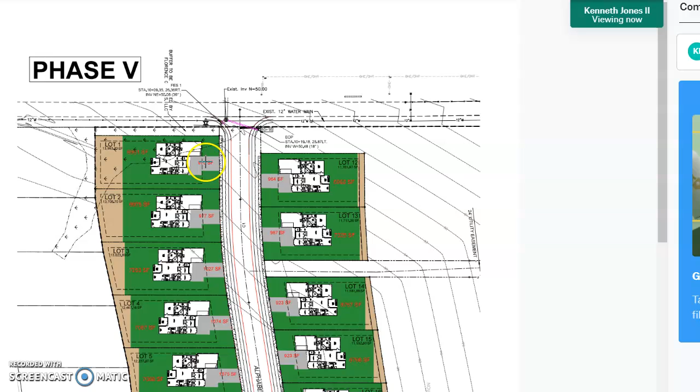There's also, in each one of them, we're able to see the area of clearing and filling and sod. So very important also from a sales standpoint. This is the area that the green area will be the area that we are planning on sodding for the homeowner. And the driveway square footage, as you can see, I'll zoom in a little bit, is approximately 970 square foot. Some of these are a little bit bigger just because the house is pushed back a little bit further in the lot. And then we also have this brown area, which will just be mulched underneath and left as a tree barrier. So we will have an option for the homeowners to be able to clear this and sod this as well. However, this is what the lot comes with.

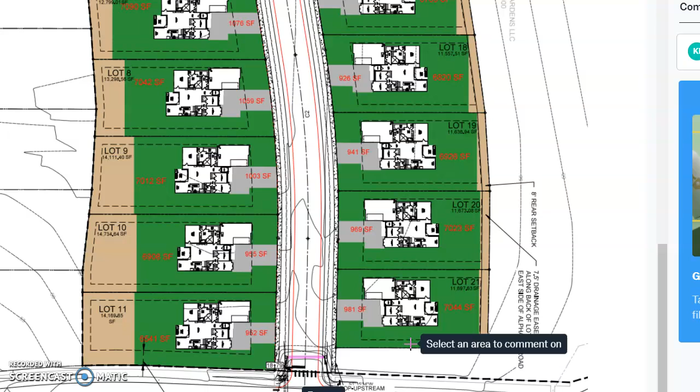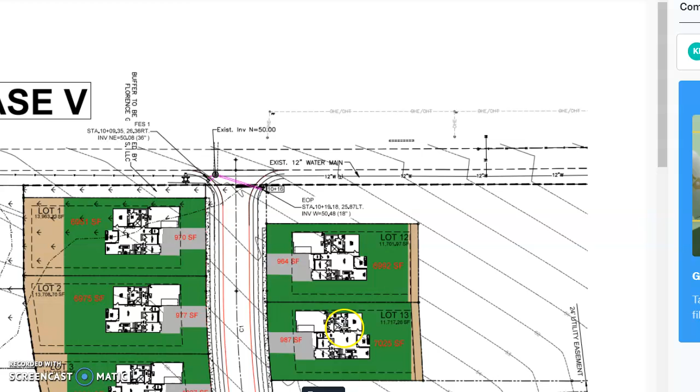So we take all of these and we put them into a spreadsheet, determine cost for each one of those, and then do an average to be able to make sure that we're adequately spacing out the cost so one lot doesn't cost $5,000 more that doesn't get passed on to the homeowner for that exact lot, because it's no different. For example, lot 12 and lot 13 are basically the same lot. No piece of real estate is exactly the same, but for all practical purposes, there's no reason that someone may pay more for lot number 2, for example, as opposed to number 3, even if lot 2 cost us $5,000 more to build on than lot number 3.

So understanding lot issues is the second reason. I'm going to go back over here to phase 5. Some of the things that can always come up in this are easements. So there is an easement that goes back to some other houses back here. That's the main entrance for the community. There's a drainage and utility easement.

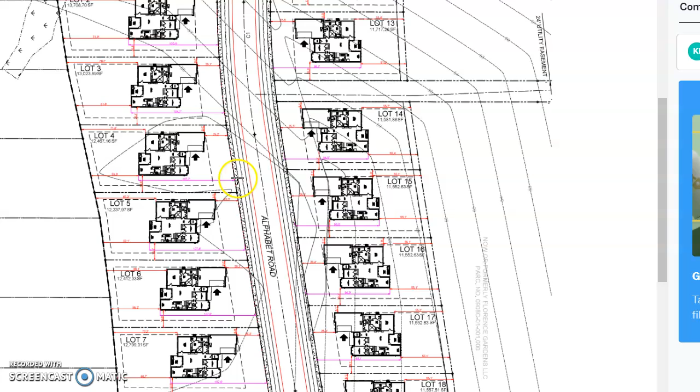We also run into culverts that would be potential on these roads. In this particular community, there are no culverts because there's no underground drainage. A lot of times we've seen where a culvert that was supposed to be on a lot line would be, for example, right here. That would severely inhibit, without major modifications, the ability to put a car and drive over it and then pull into the driveway. So if there was a culvert here, then we may have to face this house and have it be a garage left instead of a garage right. So the driveway would come from here and then over into the garage from there.

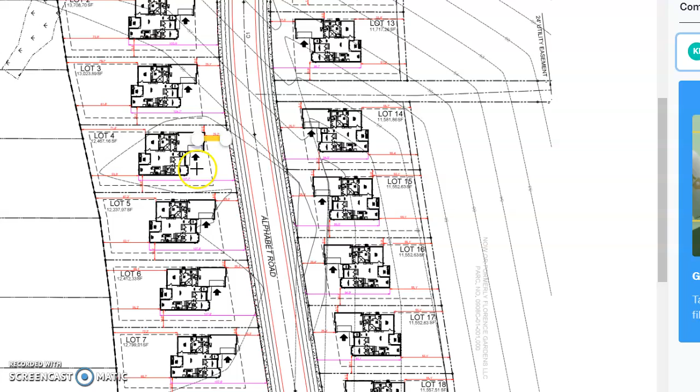So that's how we all understand some of the lot fit issues. There's obviously various other ones, but this is something that we go over with the production team to make sure that they understand what their potential issues are before we start construction and not during.

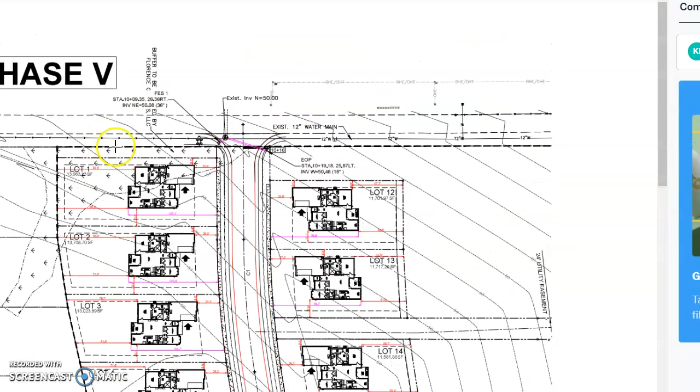The next thing is, of course, selling the right house. We don't want to sell a house on a lot that does not fit. So when we go through this, if you look at the Alton Charles, every house fits on every single lot. Let me give you a better example.

We have some communities that have not only the courtyard option, but also side load, front load, 3-car, 2-car, and everything else. So now I'm going to take you to Village Green, go back to that community folder template, phase 2, and then lot fits. I'm going to pick the Bailey and Kale plan. On this particular one, we have the 2-car front.

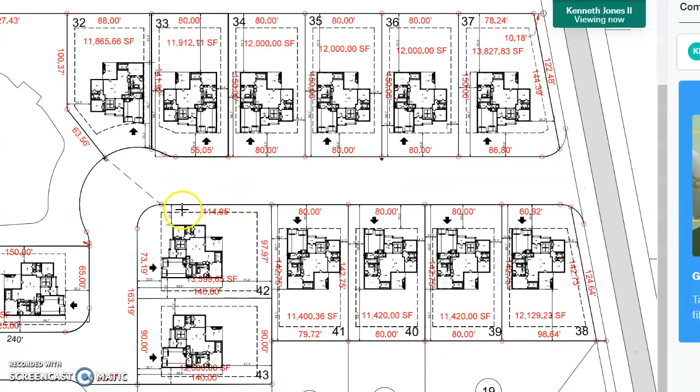As you can see on every single lot here, that 2-car front fits. Very easy to understand and look at. By the way, there's a PDF file that has all the layers on it. I save each one as a PDF to make it easier to zoom in and zoom out. The other file is very large and takes some time.

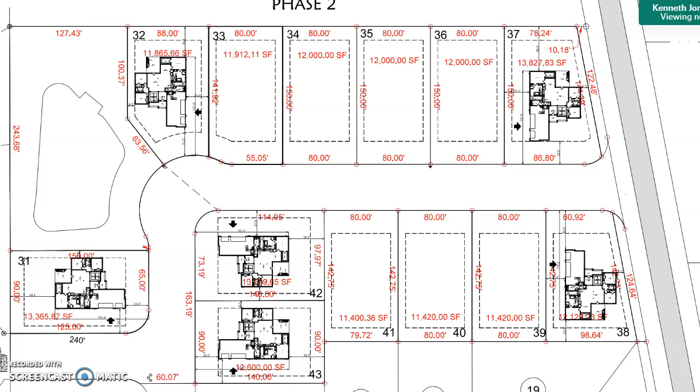So the last way that we can use this is for a preliminary site plan. This also feeds into the last point of selling the right house. If we go back to our example, we can allow the buyer to see, at least preliminarily, how the house is actually going to fit on the lot and the dimensions behind that. A lot of times I was getting requests for preliminary site plans to see what the backyard was going to look like, how much room they were going to have, if they were going to be able to park a boat in the backyard, or have a swimming pool, and things like that. So this actually does have a preliminary site plan.

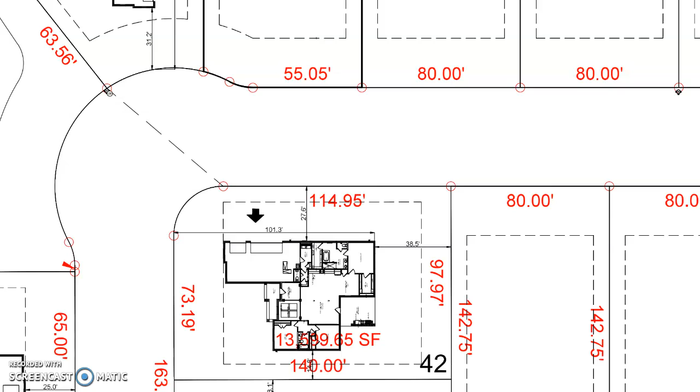You can always do a screen capture. There's an easy tool called the snipping tool that you can download, and you can always do a screen capture and show it to the buyers or email it to them very easily.

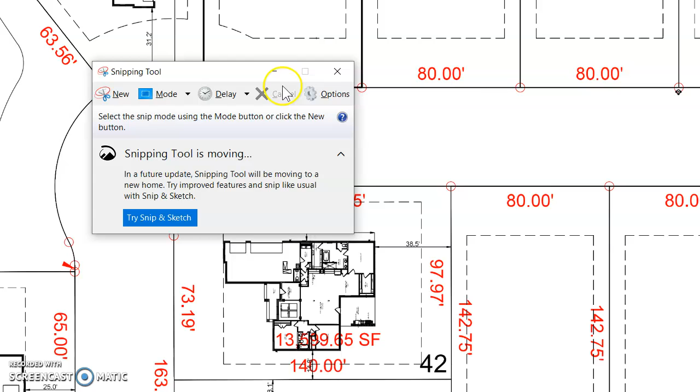So we have this one particular right here. Let's say the buyer is interested in lot number 42. They have a Bailey 3-car side load. Right now we can tell them and show them that the lot is 13,599 square feet. The dimensions are 140 by 97, and there's a little bit of difference because of this curve here. Now we can show them that from the very front of the house to the back of the house is 101, the side is 27, and they have a backyard of 38, plus some additional backyard right here.

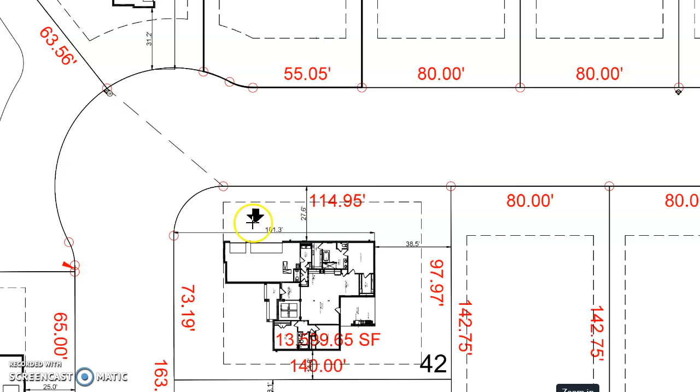So if they wanted to print this out and sketch out some landscaping, or sketch out a potential pool area, you could help them by drawing this in, and you can always work with them. If there are adjustments that need to be made prior to the actual slab going in, then we can talk to them and look at potentially sliding this over a couple feet or sliding it over this way. Obviously, you want to make sure you always have plenty of room. These arrows dictate where the cars would pull into the driveway.

So that pretty much sums it up today. Just wanted to go over everything. Of course, if you ever have any questions, welcome to email us for additional help. Thanks, have a great day.